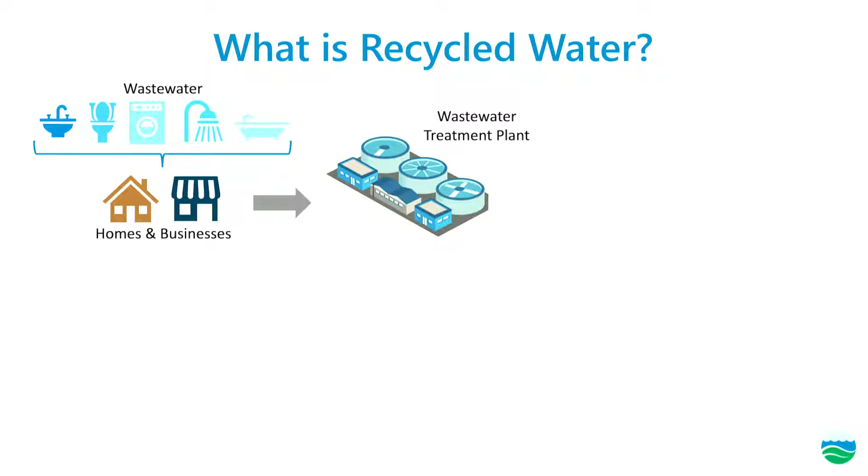Let's talk about recycled water. What is recycled water? It comes from the wastewater that goes down the drains in our bathrooms, kitchens, and laundry rooms, in both our homes and businesses. This wastewater is sent to treatment plants, where it's cleaned so that contaminants and solids are removed, making it nearly indistinguishable from drinking water. This cleaned water is called recycled water and can be used for a variety of different purposes.

Recycled water has different names depending on the level of treatment. The most commonly used recycled water is called tertiary treated recycled water. Tertiary means 3, standing for the 3 different treatment processes the water goes through before it's reused. It's also more commonly referred to as purple pipe water.

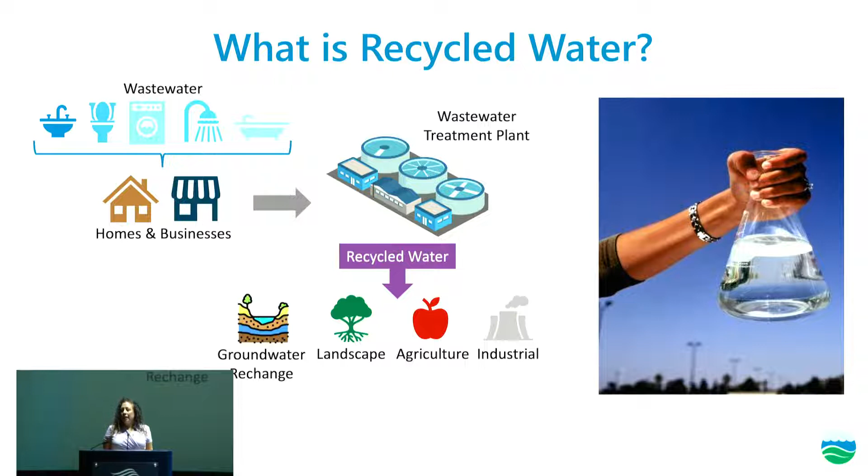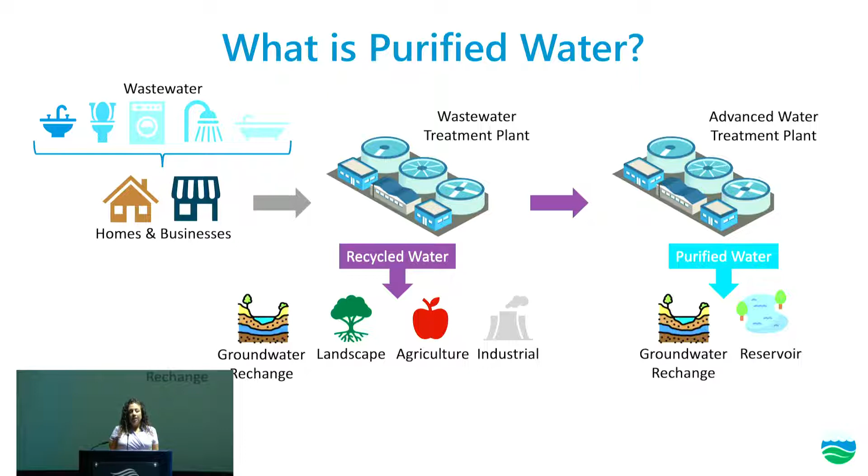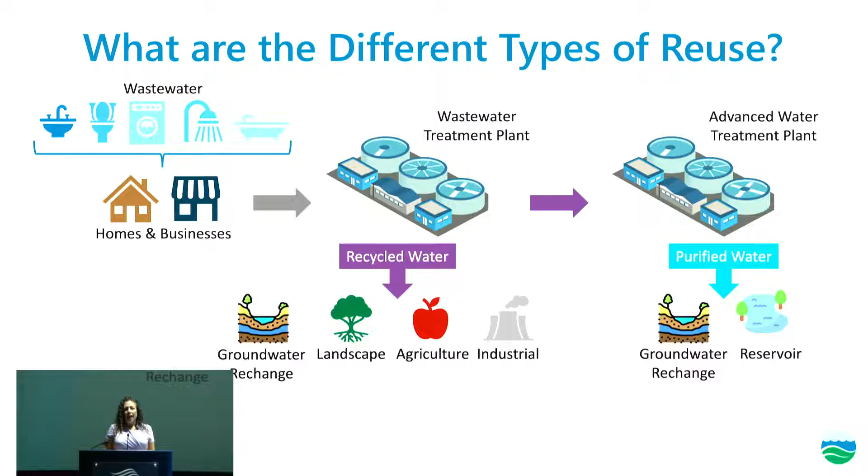More recently, purified water has become more popular. Purified water is recycled water that goes through additional advanced treatment processes, and it's so clean that minerals actually have to be added back before it can be reused. This water can be reused for a variety of purposes. This reuse is all regulated by the state, and it's categorized as either non-potable reuse or potable reuse.

Non-potable reuse refers to recycled water used for purposes where the drinking water supply is not intentionally being supplemented with recycled water. This includes uses such as landscape irrigation, agricultural irrigation, and a variety of industrial uses.

These uses are commonly referred to as purple pipe uses, and as the name implies, the water is delivered through pipes that are purple. So if you're ever out and about and you see purple sprinkler heads, purple fire hydrants, purple signs, or purple pipes, you know that site is using recycled water.

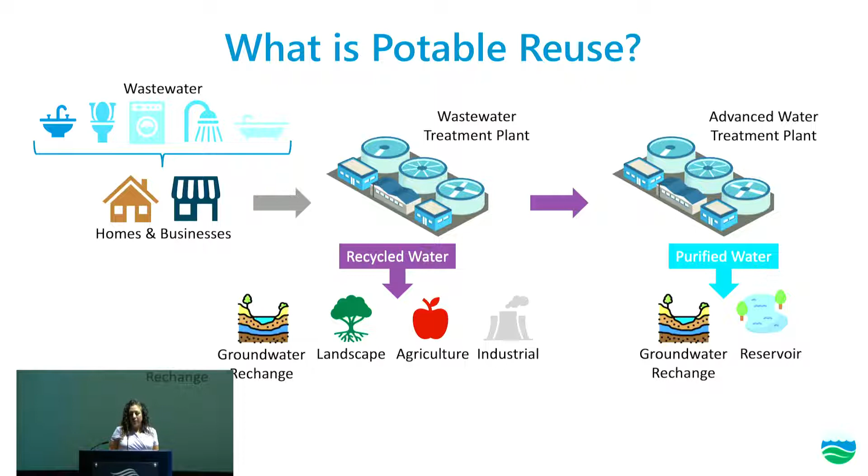Potable reuse, on the other hand, refers to uses where the drinking water supply is intentionally supplemented with recycled water. This can be done either indirectly or directly.

With indirect potable reuse, the recycled water, both tertiary and purified water, spends time in an environmental buffer. These environmental buffers may include groundwater aquifers, where the recycled water is sent to spreading basins where it can percolate and enter the groundwater supply, or it can be injected directly into the groundwater supply.

Additionally, surface water reservoirs can be an environmental buffer. Here, the recycled water is used to supplement the drinking water reservoirs. These environmental buffers allow for an additional layer of natural treatment.

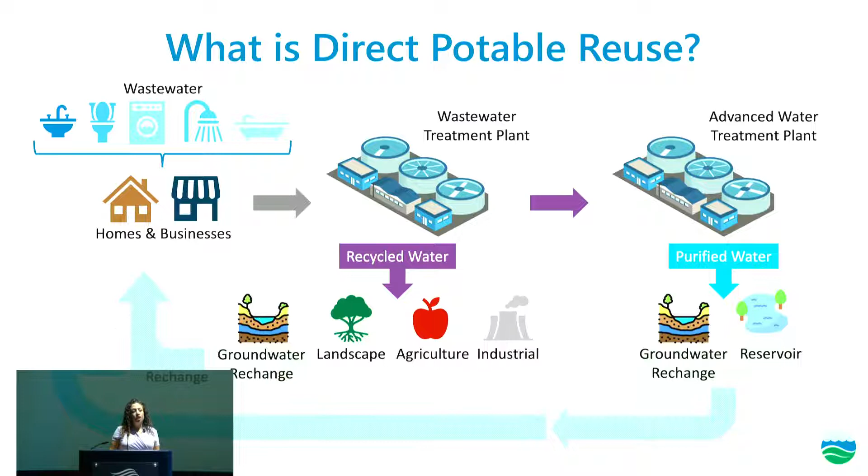Direct potable reuse, on the other hand, removes these environmental buffers. The water is instead directly put into our drinking water system. Another distinguishing factor of direct potable reuse is that only purified water can be used for this, ensuring it's the highest quality of water for this use.

The state only recently approved regulations for direct potable reuse, so there are no projects currently doing direct potable reuse in California, but there are many agencies looking into this.

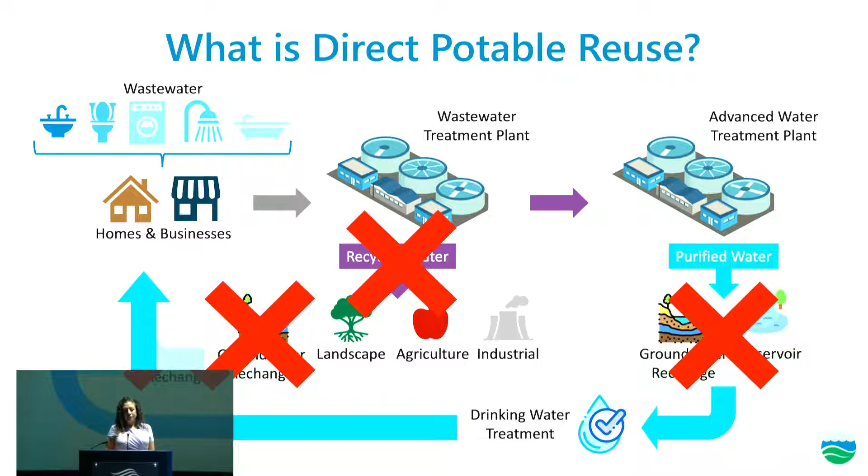Why is recycled water so important? It's because it's a reliable, safe, high quality, and plentiful source. With recycled water, we're able to enjoy the lush landscapes we've grown to love here in Southern California, instead of having the desert that Southern California is really intended to be.

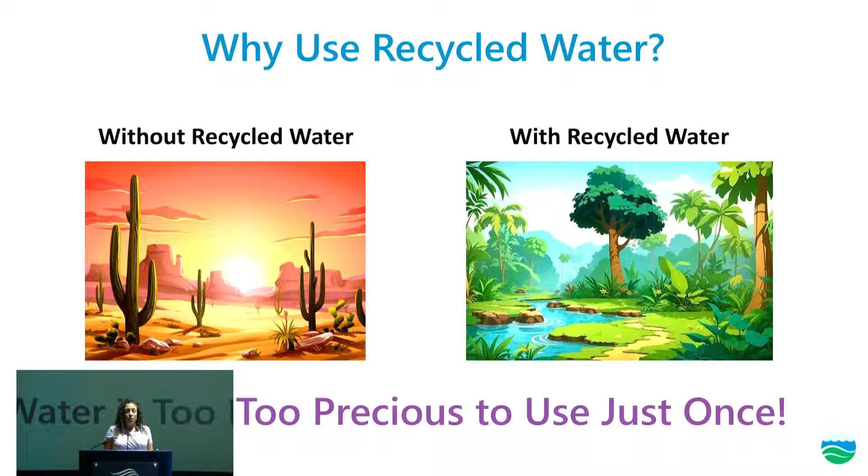Like we like to say at our agency, water is too precious just to use once. As many of you have likely heard, all water is recycled water essentially — the earth is making no new water. Mother Nature has her own natural processes that clean the water before it gets to us, and the treatment that wastewater goes through at our treatment facilities just mimics what Mother Nature does, but on a much faster pace.

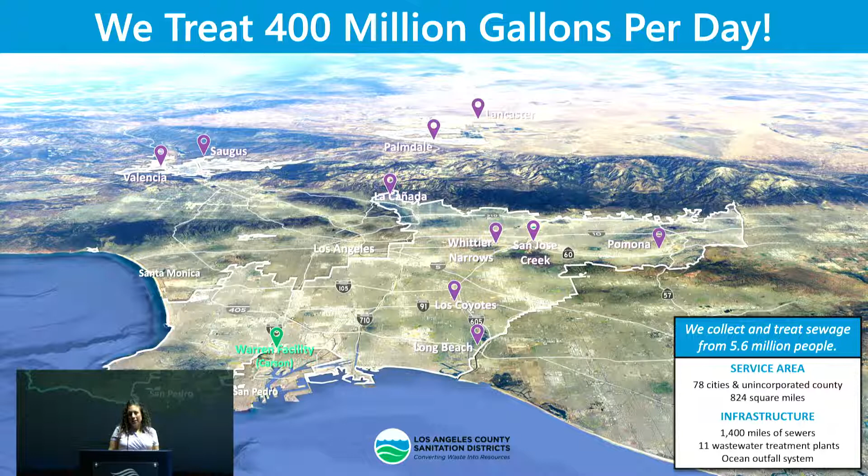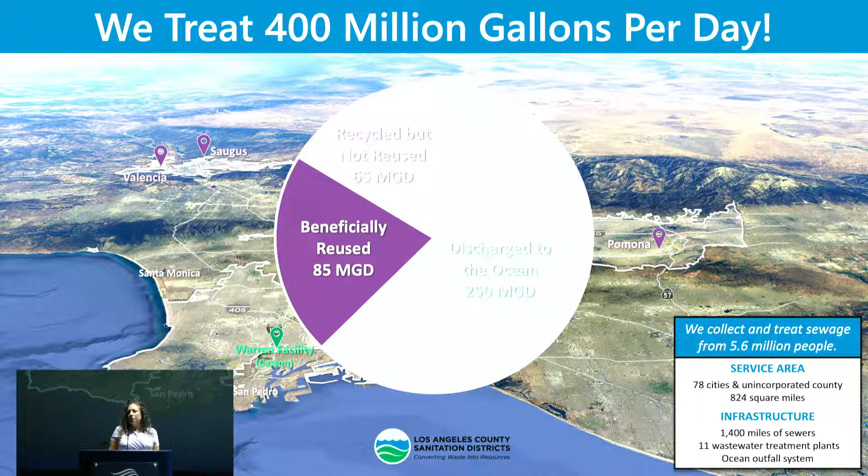Of this amount, approximately 85 million gallons is beneficially reused throughout our service area for the uses I described earlier. 65 million gallons is recycled, but not beneficially reused.

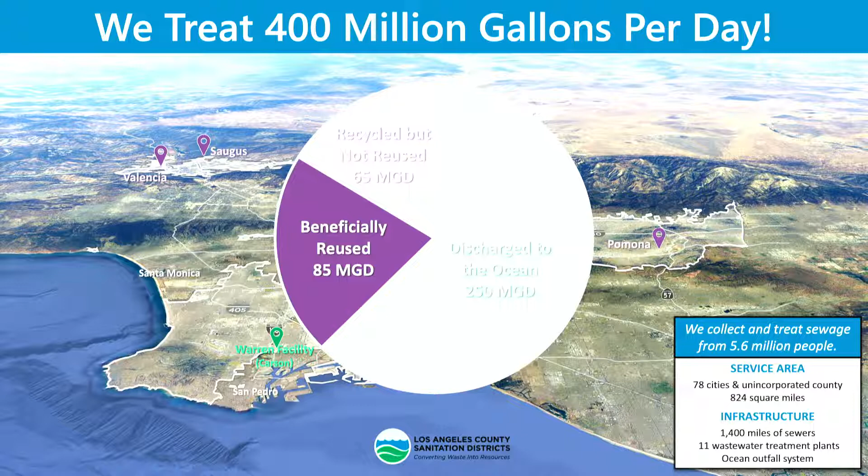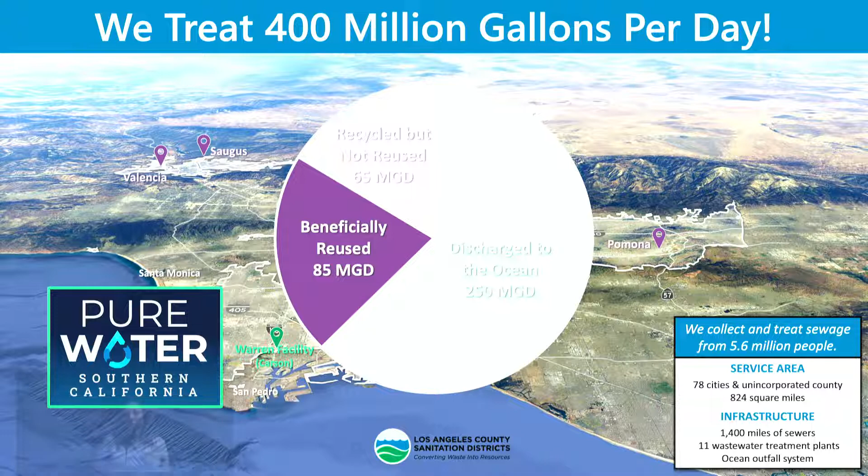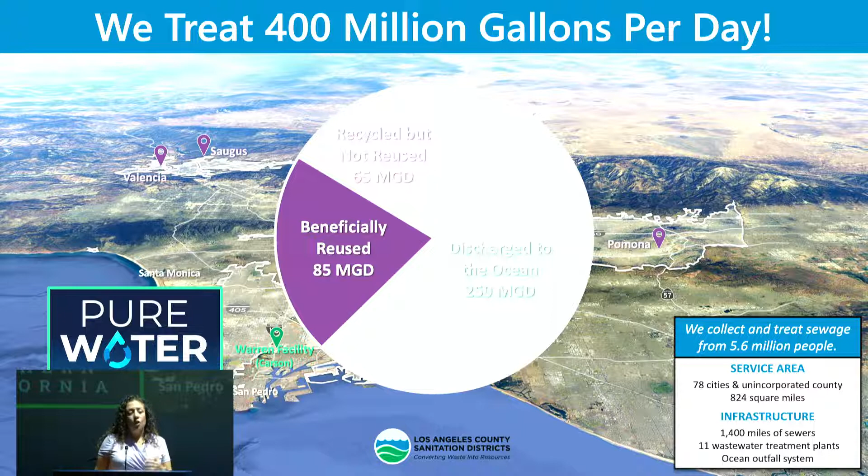And approximately 250 million gallons is treated, but not to tertiary levels, and is discharged to the ocean. This water is actually here at our A.K. Warren Water Resource Facility. The sanitation districts and Metropolitan Water District of Southern California are working together right now to reuse this untapped source. The Pure Water Southern California project will purify 150 million gallons a day of this water that is currently being discharged to the ocean.

The sanitation districts has a long history of recycled water. We have been producing recycled water since 1962, and since that time, over 1 trillion gallons has been beneficially reused. We currently have over 950 reuse sites throughout our service area, and are partnering with over 30 local cities and water agencies to reuse this water.

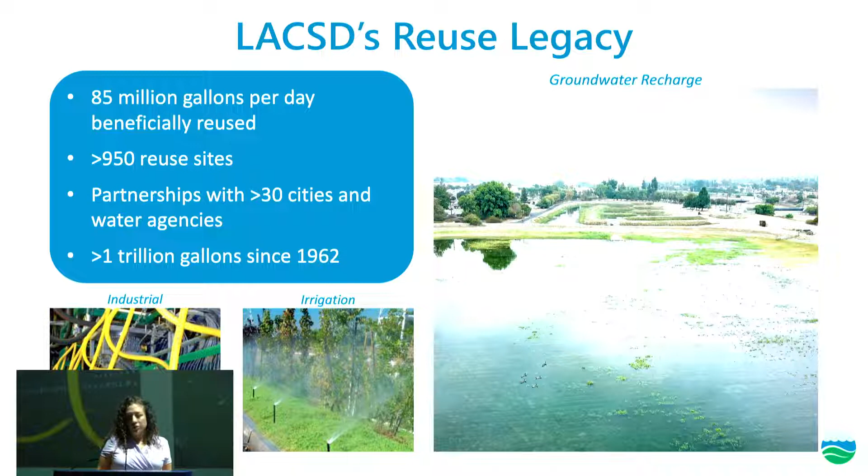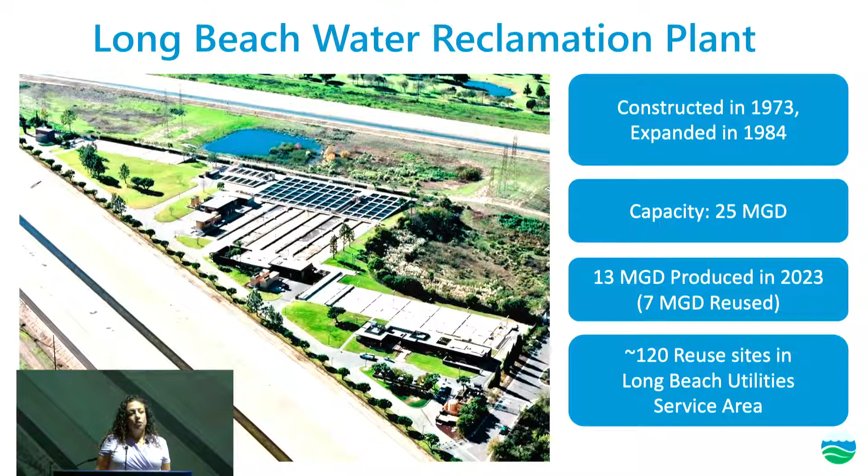Locally, we own and operate the Long Beach Water Reclamation Plant, located by the 605 freeway and the Willow Street exit. This plant has been in operation since 1973, and the recycled water produced here is beneficially reused in this local area in the city of Long Beach, in partnership with the Long Beach Utilities Agency. Ty will now go into how this water is used locally.

Hi everybody, my name is Ty, and if you like my presentation, my name is Ty. If you don't like my presentation, my name is either Heather or Monica. So I'm going to talk about what Long Beach uses its recycled water for. To represent recycled water, I am wearing a purple shirt. I see most of you did not get the memo. I got the memo, and now I'm thinking it was just a cruel joke. But Monica is in support of that. Yeah, but we do put the recycled water into a purple pipe so that it's easily identified, so that you don't accidentally tap into it and drink from it, because it's actually not potable water.

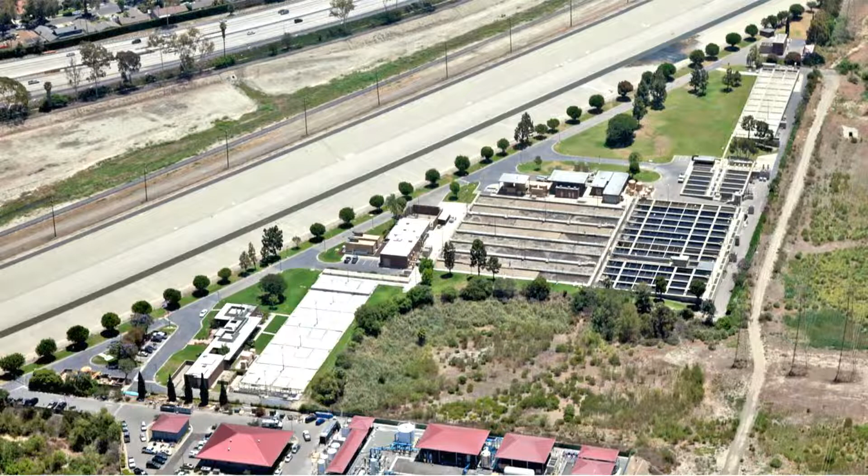It is recycled water and has beneficial uses, and I'm going to tell you about what we use it for. This is the Long Beach Water Reclamation Plant, right off the 605 freeway and Willow. I'm always grateful for the foresight of our previous board and general managers -- I think we have one here in the audience today. In the 60s, they traded this land to LA County Sanitation to build this plant. In exchange, all the recycled water produced from this plant belongs to the residents of Long Beach. So the Long Beach Utilities Department then tries to find beneficial reuse for all this water that we had the foresight to obtain back in the 60s.

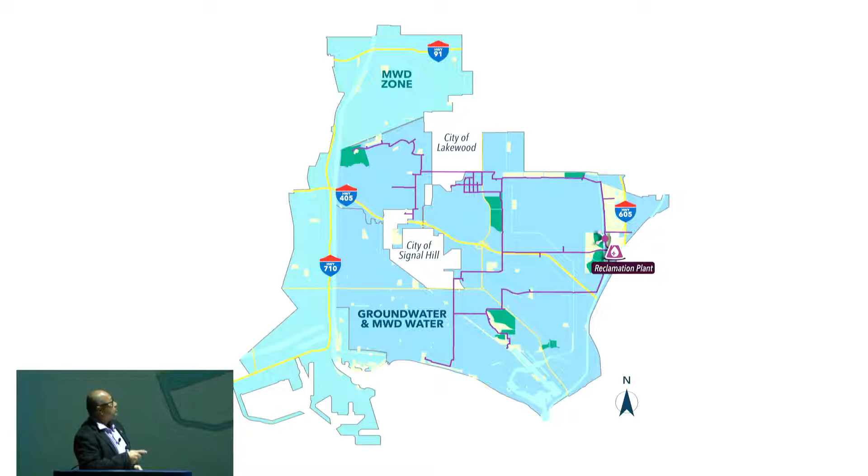This is the map of Long Beach and our major recycled water pipeline infrastructure. The Long Beach Water Reclamation Plant is on the east side of the city, and we deliver it to major properties and users across the city: golf courses, parks, and one of our biggest users is THUMS Island.

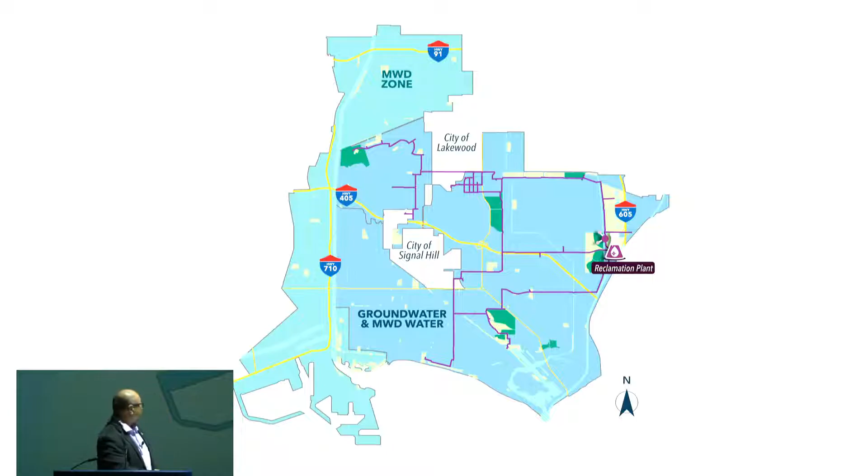Some of you have seen THUMS Island when you drive along Ocean. That's that weird island that, when I first moved to Southern California, I was like, hey, how do I buy a house on that island? But it's not a house -- it's actually an oil drilling operation.

When they drill oil out of the Wilmington oil field, it's actually only around 3% oil and 97% water. They extract the oil from it, but they need to put the water back into the ground so there's no subsidence. They need to make up that 3% plus a little extra to fully recharge that void they extracted the oil from. So instead of using potable water, they take recycled water and blend it with the oil-extracted water and then put it back in the ground. That is a great beneficial use of the recycled water.

Another beneficial use of recycled water is making sure we have beautiful lawns at our cemeteries. Another beneficial reuse is to irrigate the golf courses -- we want everyone who enjoys golf to have pretty fairways and especially putting greens, but we want to do it environmentally correctly. So we offered recycled water to our golf courses in the city, and they all took it, which has really helped reduce our potable water demand while keeping our golf courses green.

One of the newer recycled water uses is the duck pond, located off of Studebaker by Willow. When the city rebuilt the duck pond, Long Beach Utilities Department worked out a deal with the city where we would start to fill the duck pond with recycled water.

The reason we want to do that is because recycled water availability does not match up with water usage in terms of time. Usually recycled water becomes available about 3 hours after people start using the facility. So when you get up in the morning, brush your teeth, make breakfast, take your morning shower, 3 hours later there's recycled water. And then at night, when you go home and do laundry, wash dishes, take showers, 3 hours after that there's recycled water.

But because recycled water is not potable, the rule says we cannot use it before 10 p.m. So we can only use it between 10 p.m. and 6 a.m., but that's not when recycled water is available. So we have to create storage.

One of the neat ways for us to create storage is to use this pond, so that during the day when recycled water is available, we can pump recycled water into the pond, and at night when the adjacent golf course, the Eldorado golf course, needs the water, they can pump out of the pond and irrigate the golf course.

At the same time, it's kind of a win-win because by recycling the water out of the duck pond, it will keep the water more fresh, so it doesn't get as foul. No pun intended, or maybe pun intended. At the same time, the ducks do help provide additional nutrients to irrigate the golf course.

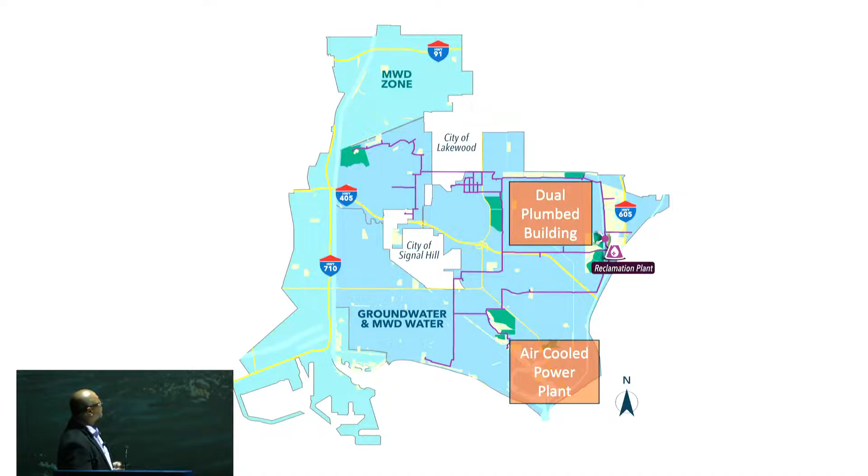A couple of other major projects to highlight that I don't have cool pictures for: we have one dual plumbed building, which is a facility that not only uses recycled water for irrigation on the outside, but they elected to use recycled water for flushing toilets. So when they built the building, they had to run a whole separate set of pipeline just so they could flush bathrooms with it. There are very strict rules about doing that, but this company really felt it was their duty to be environmental stewards, and they put in a dual plumbed system in their facility. This is over in Douglas Park.

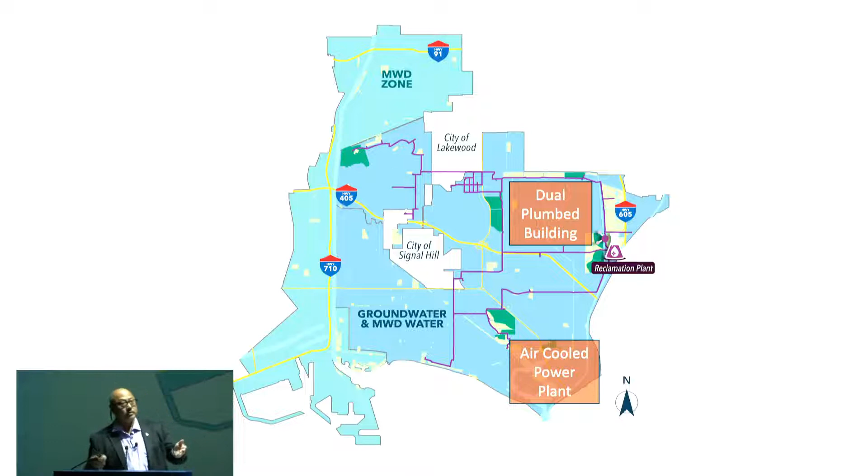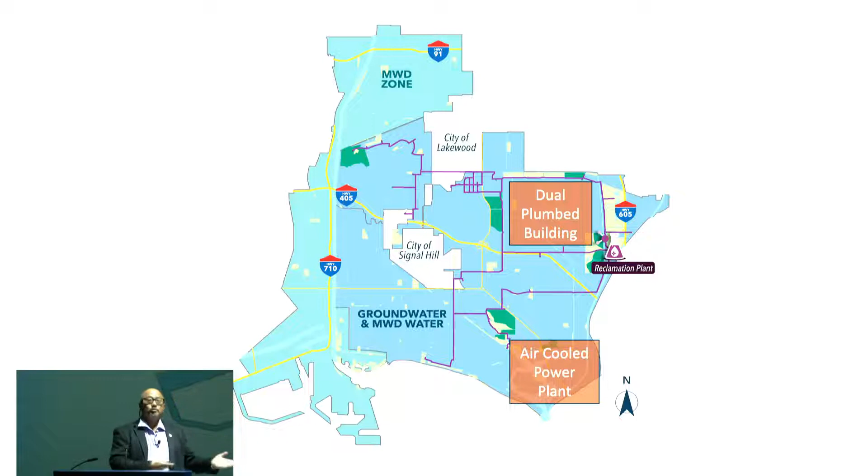Then we have a project we're working on with LADWP at the Haynes Power Generation Plant. These coastal power plants traditionally use once-through cooling to cool their systems. They would bring in ocean water, run it through, and it would cool off, then dump it into the San Gabriel River in this case, and the San Gabriel River is pretty warm. But because of impingement and entrainment, the EPA changed the Clean Water Act, specifically Rule 316B, which says coastal power plants must reduce their once-through cooling, or impingement and entrainment, by 95%. That essentially eliminated once-through cooling for coastal power plants.

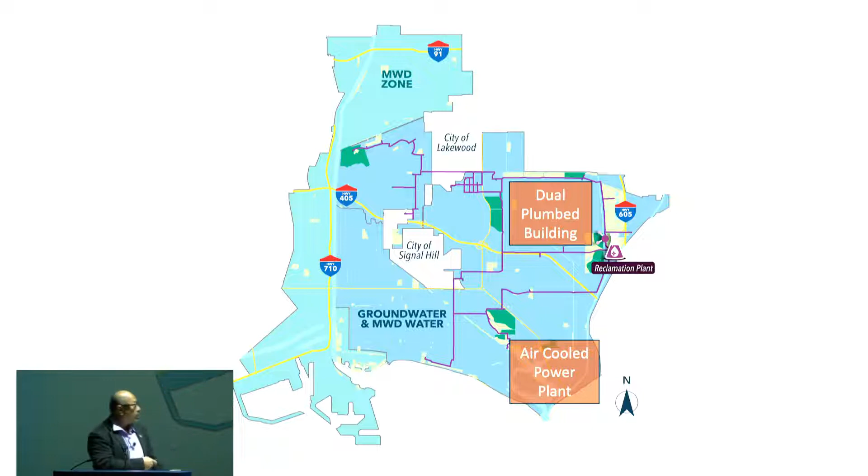So coastal power plants now have to go to air cooling. But air cooling still uses water. Instead of using potable water, we're working out a partnership with LADWP so that we deliver recycled water to the power plant. That way, they're not using potable water, they're using recycled water, and then it actually gets returned back to the Long Beach Water Reclamation Plant, creating kind of a loop for us to help have that sustainable operation.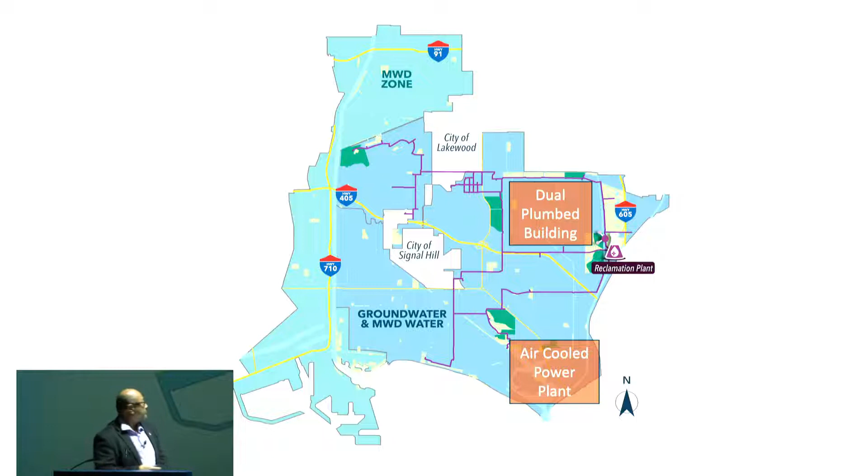Now, lastly, one of the uses I really want to point to is advanced reuse water. This is the water that Monica was alluding to, recycled water that's been heavily treated. But before I talk about that, I want to talk a little bit about how groundwater travels in our region.

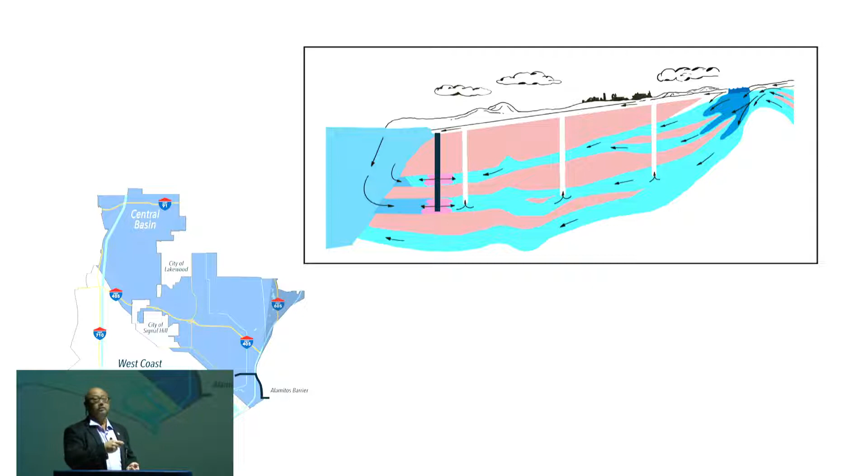Up here by the San Gabriel Mountains, or the foothills of the San Gabriel Mountains, we have our natural spreading grounds, or natural recharge area. Water travels through these underground aquifers towards the ocean, and as you can see, many cities will start to extract water. It's kind of curved, but if you look at the elevation here, it's higher than the surface elevation here.

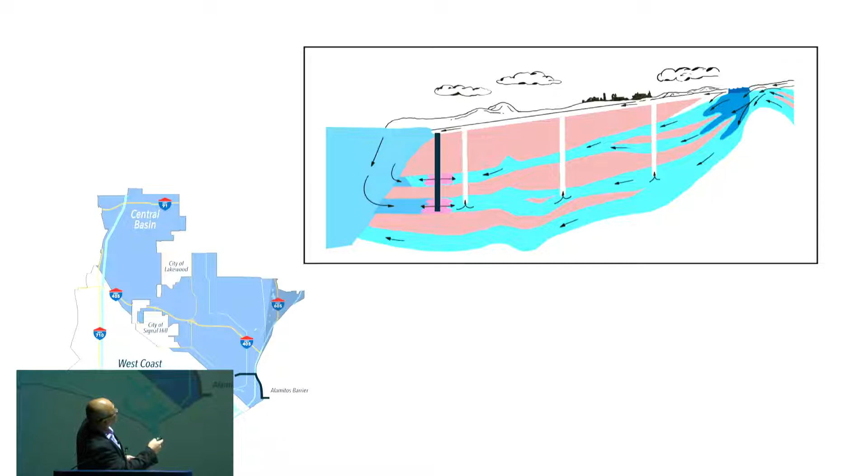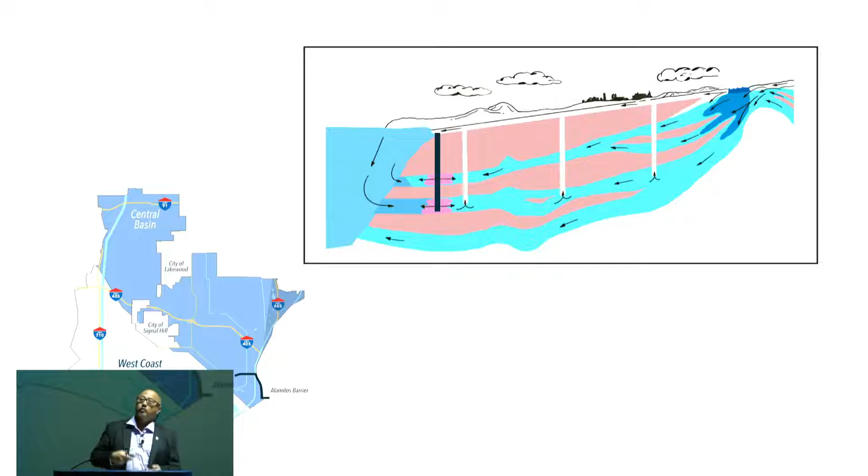Fun fact: as water enters here, it's under pressure in this aquifer, so when the city of Artesia drills a well, this pressure pushes water out, and you have an artesian well. That's why the city is called Artesia. And in Orange County there's Fountain Valley, because in the early days there was a lot of this groundwater just popping out of the ground like artesian wells.

As water travels down towards the coast, you come across the ocean. Now there lies a problem: the ocean is going to want to push salt water towards the groundwater aquifer. This salt water can actually contaminate the drinking water aquifer as Long Beach starts to extract this groundwater.

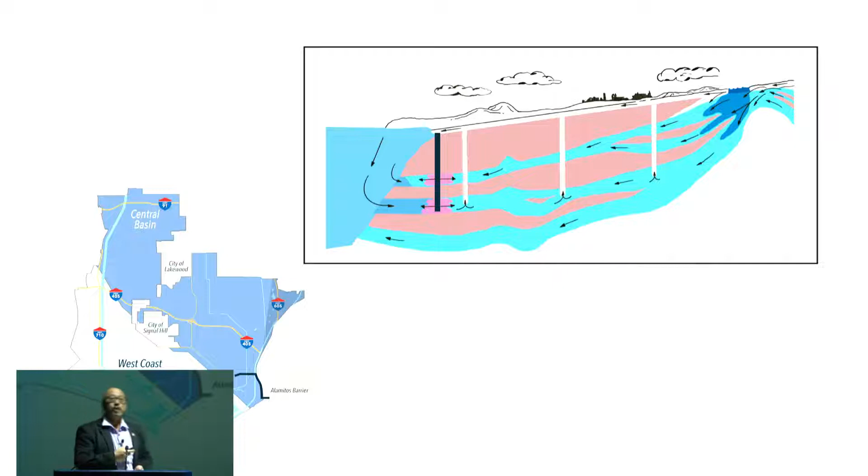The way to prevent the seawater from coming into the groundwater aquifer is to create a mound of water by injecting water down this pipe, which will push the water back and prevent the seawater from intruding into the groundwater aquifer.

Historically, that's done with potable water, but that's not really the best use of potable water. So what we want to do is take recycled water and supertreat it so we can use that supertreated recycled water, what I like to call astronaut water, because astronauts don't get to bring water up to space, so they have to reuse that water. Then they inject this astronaut water back into the groundwater aquifer to create that mound. That's why it looks a little purple.

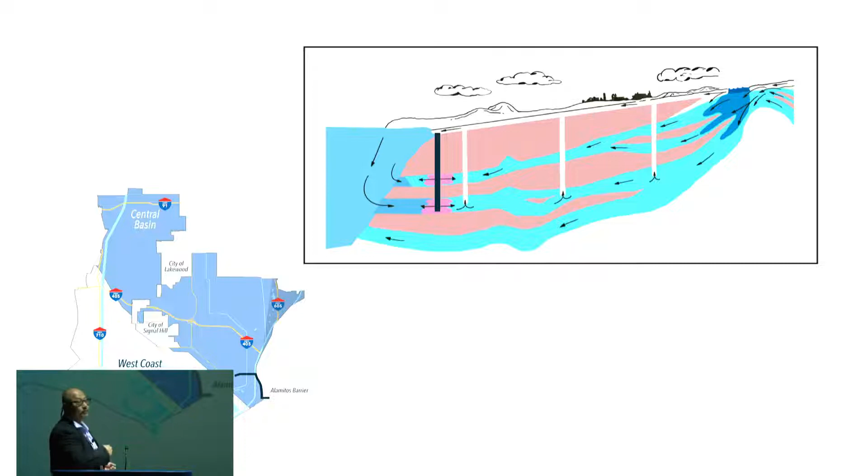On the map, this is the barrier with a bunch of wells that LA County Public Works operates. They get water from Long Beach as well as from the Water Replenishment District, and they create this little barrier to prevent seawater from coming in. There are actually two other barriers: one here called the Dominguez Gap Barrier, and another on the West Coast Basin.

I want to talk a little bit about this astronaut water. The facility we get it from is the Leo J. Vander Lans Advanced Water Treatment Facility, located right next to the Long Beach Water Reclamation Plant, and it's owned and operated by the Water Replenishment District of Southern California.

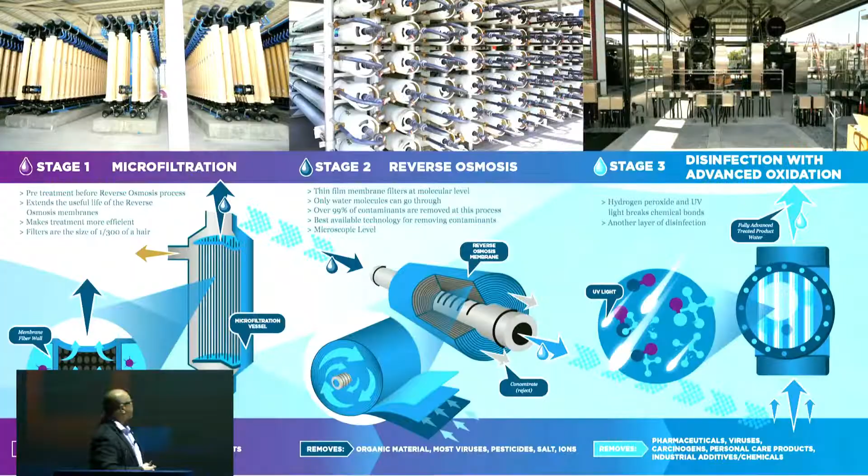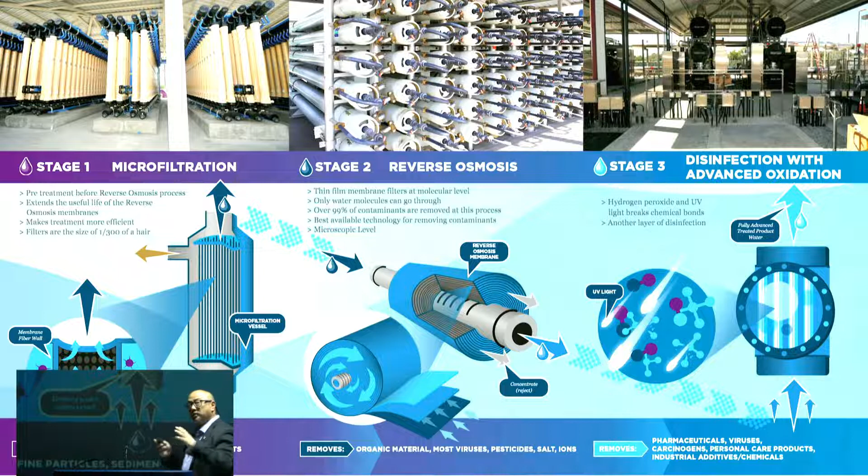This is where we take tertiary treated recycled water, the purple pipe water, and convert it into advanced recycled water or reuse water. The way we do it is run the purple pipe water through microfiltration to remove particles. The cutoff for these membranes, the pore size, is roughly 0.05 to 0.5 micrometers. For reference, your hair is roughly 70 micrometers, so that's how small these pores are. They're designed to remove most of the particles out of the water.

After that, they'll run the water through reverse osmosis. The reverse osmosis membranes start to remove salts and dissolved particles in the water—this is where we're removing things like calcium, magnesium, and a whole bunch of other salts.

This is kind of what Monica was saying too: once we remove the salt from the water, it actually gets a little too pure. If you look at a bottle of Dasani, that water goes through a membrane treatment, and they strip out so much minerals that it's very flat. So what they have to do is remineralize it. If you read the label, it'll say it's remineralized, purified water—they strip everything out and then put minerals back into the water.

We do that with the recycled water after RO treatment. Then after that, we want to blast it with some kind of disinfection—this is what we call a multi-barrier approach. Here we have a physical barrier, here we have a chemical barrier. In this case, it's UV with peroxide, which makes hydroxyl radicals.

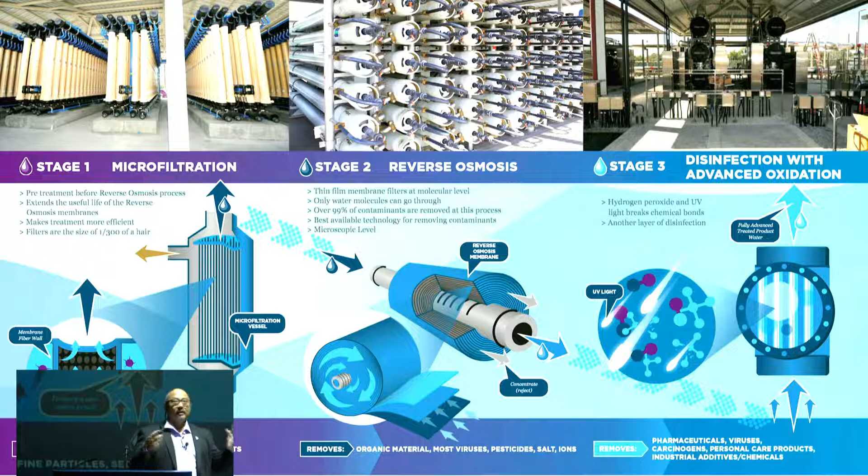Those hydroxyl radicals are compounds that are electron scavengers, so they really start to attack compounds that are really hard to break down, like 1,4-dioxane. We use the advanced oxidation process to really blast the water and remove any remaining contaminants left in it. These processes put together provide safe drinking water—when we talk about toilet to tap, it's these science processes that make the water safe.

For indirect potable reuse, the requirement is what they call 12-10-10, meaning that for viruses, we have to remove 12 logs of viruses. So 12 logs, each log is a 9, so that means that is 99.999999999%, right? For indirect potable reuse.

And so for that many viruses, only one can get through, right? And when we get into direct potable reuse, it's like 20 logs. So I'm not going to take off my socks to count on my toes, but that's a lot of 9s. And so the regulation is set up to make sure that the toilet-to-tap water, or the astronaut water, let's call it astronaut water, is safe to drink.

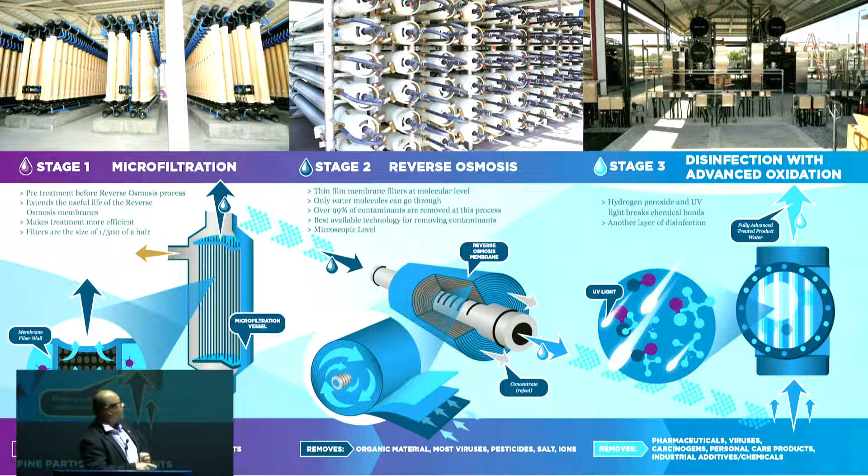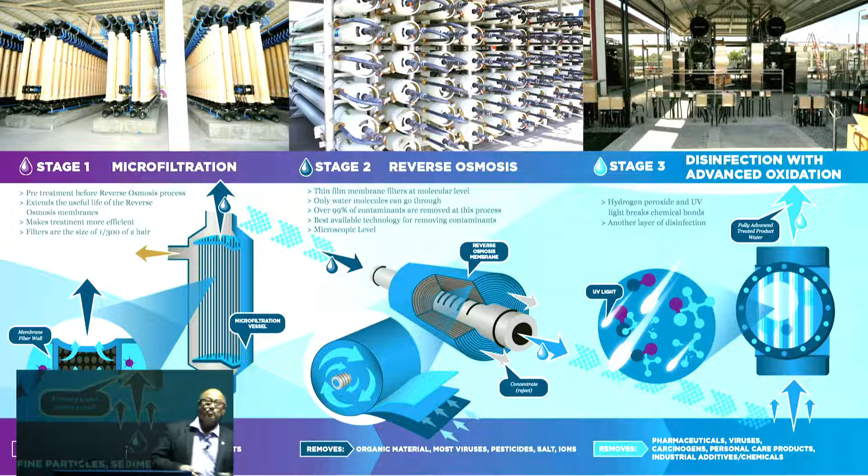Now, one neat thing, I didn't bring it today, I should have brought it, show and tell. The Water Reuse Organization, a few years back, did a homebrew contest. They challenged a bunch of really geeky engineers who like to drink beer to take recycled water and make homebrew with it. So I had a couple of friends from a consulting firm that came out to the LVL plant, took a lot of this water, and they brewed some homebrew out of it. I wish I would have brought that with me so I can show you what advanced treated recycled water homebrew looks like. It looks just like regular beer. They call it IPA - I think they call it indirect potable ale.

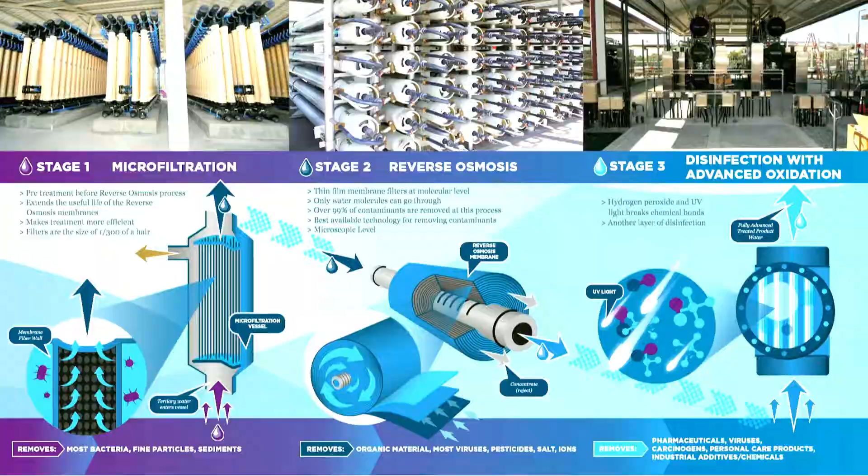So with that, Long Beach is thinking about how it plays in the world of indirect potable reuse and direct potable reuse. What really defines whether or not it's indirect potable reuse or direct potable reuse is natural attenuation time. So let's face it: the amount of water molecules we had on this earth 4.5 billion years ago is the same amount of molecules we have on earth today. So the water you drink today, somewhere along the line, may have gone through a dinosaur kidney.

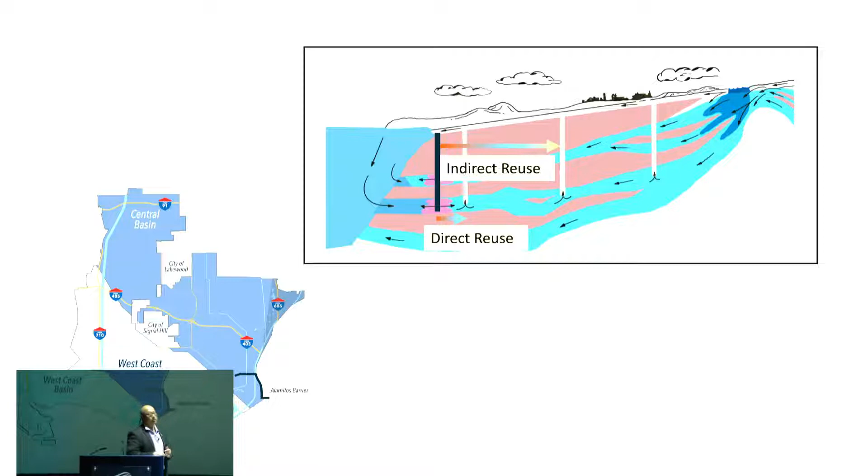We are in de facto reuse, but there is natural attenuation time. When we shorten the natural attenuation time between when the water is injected and where we extract it, if that's in between 2 years and 6 months, that's what we call indirect potable reuse. If the natural attenuation time is less than 6 months, that's what we call direct potable reuse. And within direct potable reuse, there's a whole bunch of categories, because when you get into direct potable reuse, the risk starts to really go up. So there are a lot of restrictions, rules, and technology that we have to apply to make sure that water is safe.

But the state convened a blue ribbon panel to tell us what we need to do to make sure it's safe to drink. So there are now rules that we can follow to make sure that the water is safe to drink when we start talking about this astronaut water. And so Long Beach is engaged in some of that. So I'm going to pass it along to Heather to talk about what the future holds for Long Beach.

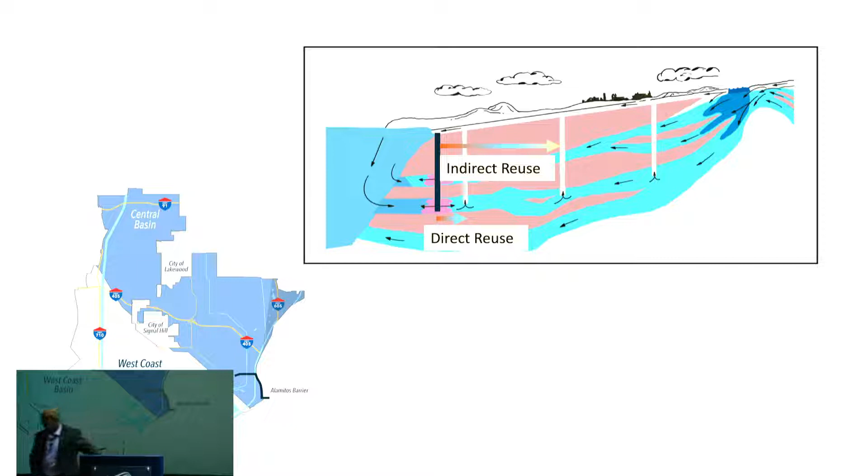So Monica and Ty did a really great job providing an overview of how recycled water supplies are generated and how Long Beach currently uses it today. So where do we go from here? That's where I fill in that picture. And the plan is really simple: we're going to continue using more of it by expanding its applications.

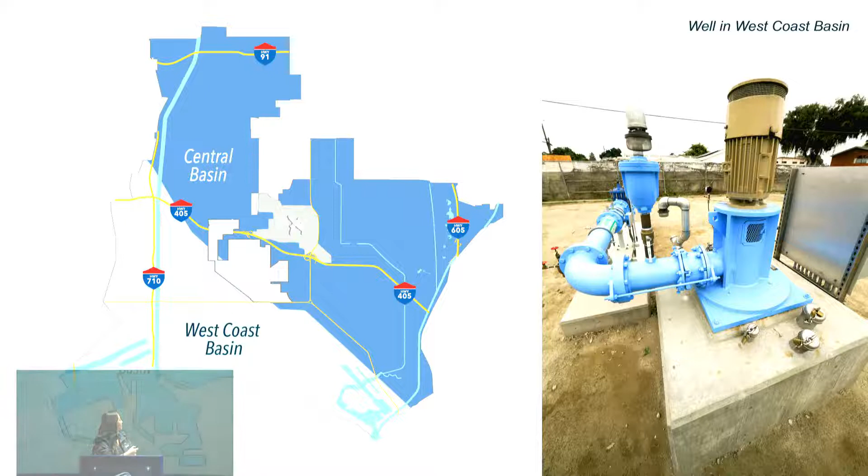So going on in the future, we actually plan to skew this relationship even further in favor of local groundwater supplies. And we plan to achieve that by leveraging recycled water into that mix. So Long Beach and groundwater is no stranger to one another. We've actually been extracting groundwater from the basins for nearly 100 years, so we've gotten pretty good at it.

The areas that we actually extract from is what we refer to as the Central and West Coast basins. Now, these basins actually cover a very large area of Southern California, but you can see how these groundwater basins look like within the city of Long Beach boundaries. So we're really fortunate to have access to 2 different groundwater basins.

Now, when we extract water out of these resources, we actually have to follow a lot of rules, and for good reason, because it's important to note that we are not the only pumper that has access into these local resources. We are just one of many. And it's really important to follow the rules because we don't ever want to get into a situation where we overdraft or overpump from these groundwater basins, which has actually happened in the past.

So, one of the major rules that we abide by in Long Beach, because there are so many, it's kind of like its own banking system, but one of the more simpler ones that we follow is tied to our allowable pumping allocation. Basically, it's what we refer to as our water rights, and it points to how much water we can actually extract from the ground in any given year. So that number in Long Beach is 32,692.7 acre-feet per year.

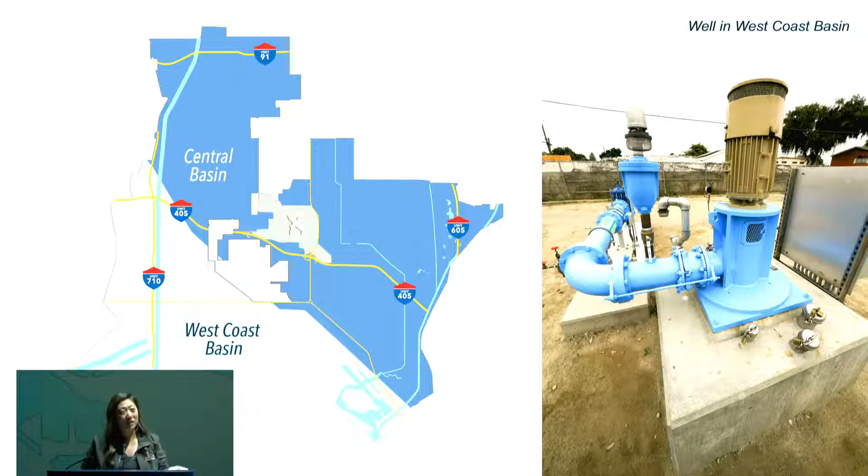So you guys don't have to worry, I'm not planning on quizzing you, but I just want to let you know that that number is going to pop up again in my presentation. So you can see here that here's what a typical well looks like for us. It's basically just some pipes and pumps sticking out from under the ground. So next time you're in a park or in an open space and you see something like this kind of sticking up, that's probably what it is, a groundwater well.

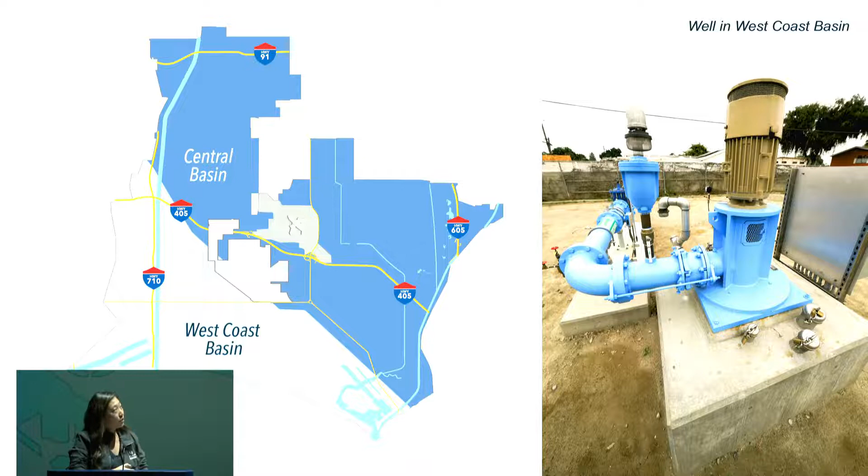Then separately, what happens is we have extraction wells. So we are able to recover that recycled water, but it's no longer in the form of recycled water. It's now in the form of groundwater supplies. And then it goes on its conventional way where we take it to a centralized treatment plant for further treatment and processing, and then we end up conveying it up to a storage tank or directly to homes and businesses for consumption.

So I basically described just really broad infrastructure, and the physical infrastructure is what allows us to move the different types of water around. But it's really important to note that that infrastructure doesn't happen without previous partnerships or agreements that happen between people and organizations, which is probably just equally as important.

So what does that look like on paper, right? Technically, the concept would be whatever we are able to inject into the ground, we would then be able to extract out. So remember that 32,692.7 acre-foot number that we are currently limited to. We can technically increase that. So it allows us to gain more access to readily available groundwater supplies, and it brings us to a more drought-resilient future because it's a more sustainable way of pumping out groundwater.

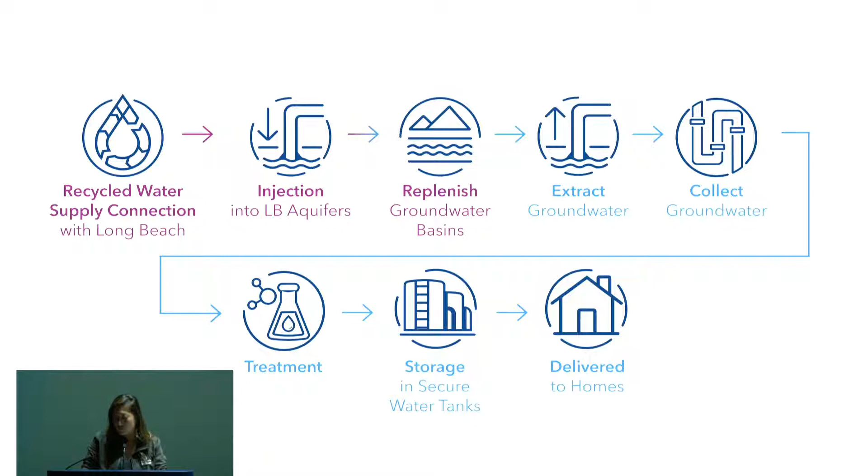So let's see. Now, we basically understand what direction we want to head into and what type of infrastructure we want to build. So we're filling in the details now. We currently have a study going on, kicked off earlier this year, and we call it our groundwater augmentation study. And basically what this study does is three major things.

First, we're taking a look at the central and west coast basins to evaluate areas within the groundwater basins that will actually accept water for injection. We're doing that in partnership with the Water Replenishment District, and we're utilizing a groundwater model to help us evaluate that. The second major component of the study looks at our existing infrastructure.

So remember, we are no strangers to groundwater production. We have infrastructure that is already there. So there's a whole bunch of pipes and pumps that we need to look at, because if the intent is to increase production capacities, we need to make sure that our infrastructure is going to be able to handle that. So part of that evaluation requires a condition assessment of our existing pipelines and assets. It also requires use of a hydraulic model.

So we're updating and calibrating the hydraulic model so that we're able to develop various what-if scenarios. And these what-if scenarios eventually help us identify any capital improvement projects. So let's say there's a pipe somewhere within our system that hydraulically cannot fit any more groundwater flowing through it. Well, we would identify that pipeline segment for a potential improvement project where we would either upsize that pipeline or design and construct an additional pipeline for redundancy and increase our capacity to take on the additional flows.